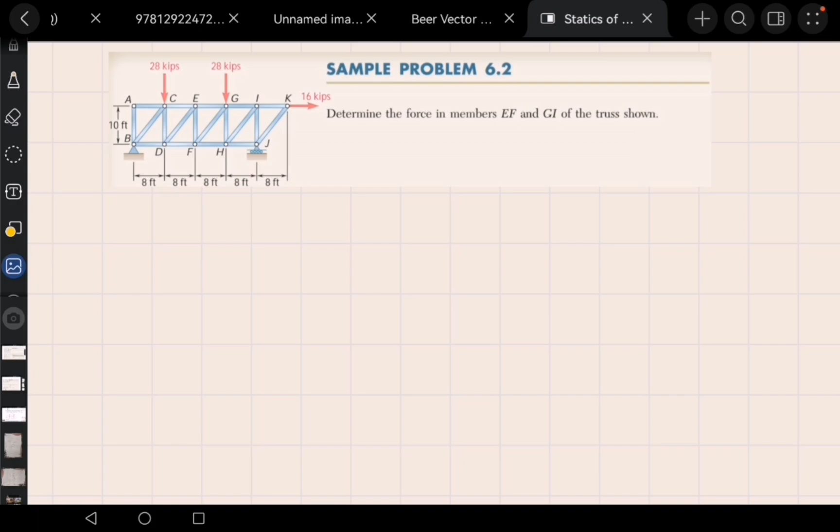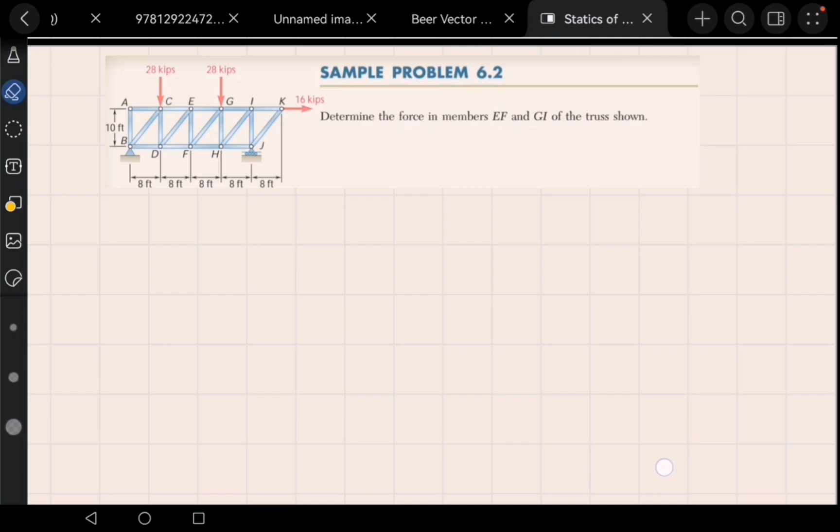Sample problem 6.2: Determine the force in members EF and GI of the truss shown.

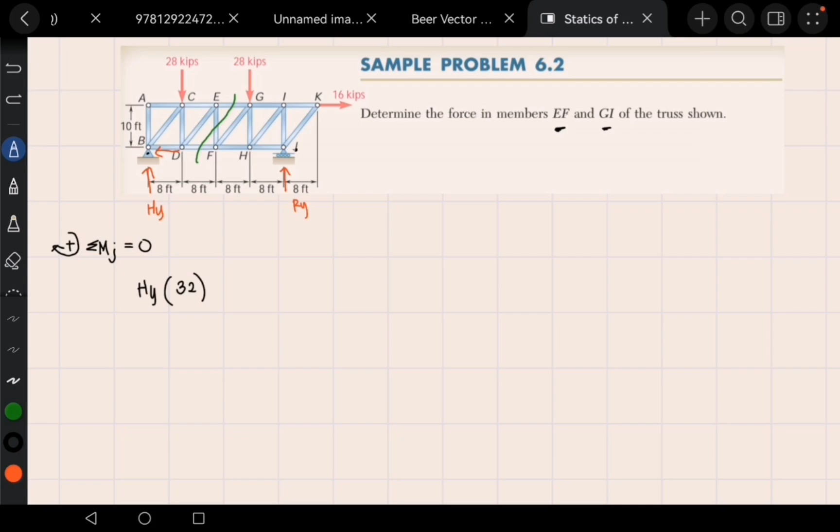Next is this downward 28 kips. When we take the moment, it rotates downward, like this - so that means counterclockwise, negative 28 kips times 24, which is the moment arm from C to J. That's 8, 16, 24.

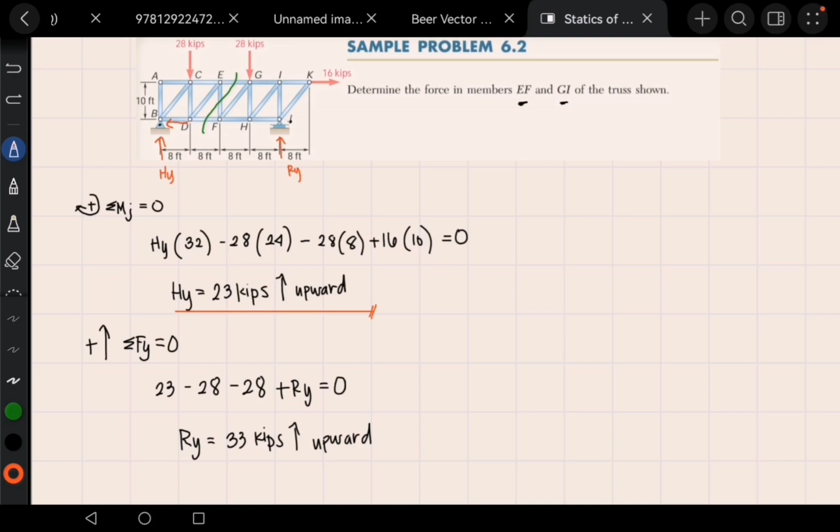First, we'll place the forces we solved earlier, which is HY, 23 kips.

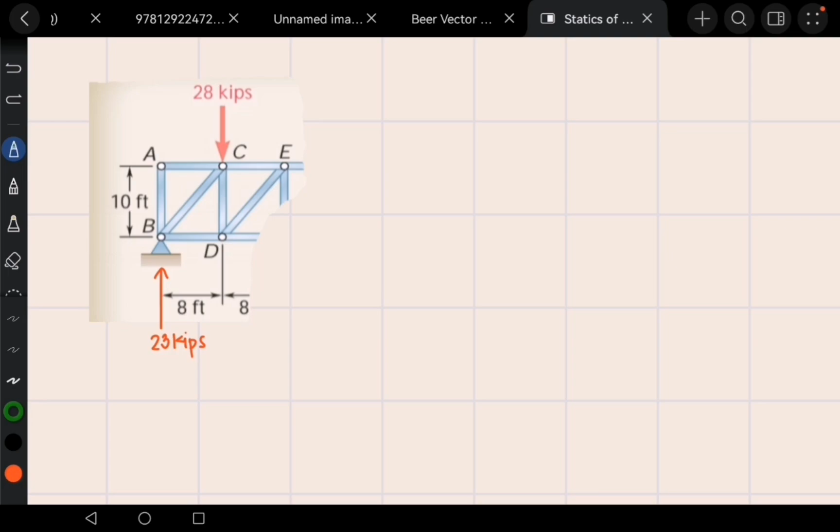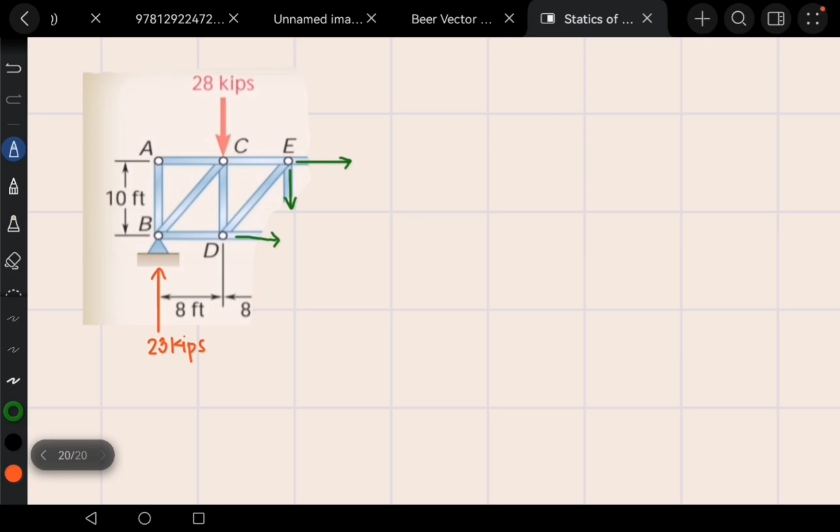So this is member EF. Ito yung EF. Tapos, ito naman yung EG. EG. And then, the DF. So, ito guys, yung mga kailangan natin solve.

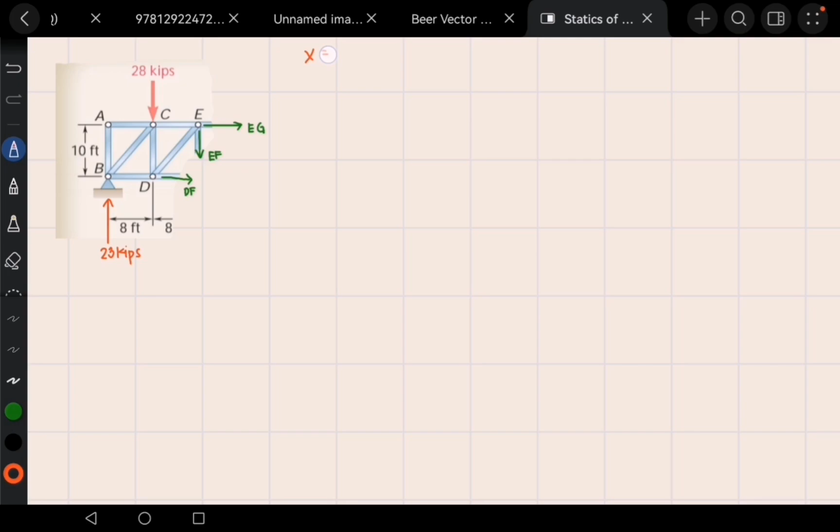So ang technique ko guys is, kung ano yung pinaka-konti na unknown, yun yung isosolve mo first. So maglalagay ka ng X equals and Y equals. Ilan ba yung may unknown natin in terms of X? Meron siyang EG and DF, so 2. Ang Y naman is 1. So unahin natin ang Y.

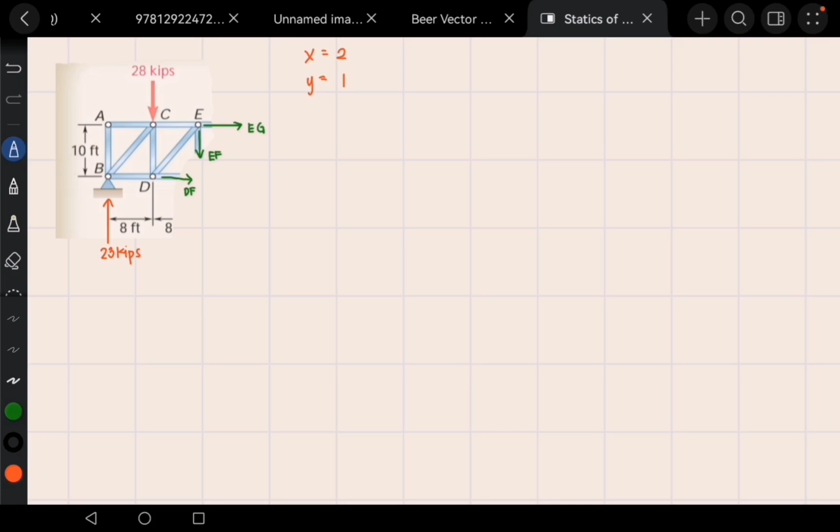Madali lang naman siya, magsa-summation of forces lang tayo. Summation of forces Y is equals to 0. Upward is positive. Dahil ang assuming natin is tension, so pababa siya, which is negative EF plus 23 minus 28 kips is equals to 0. Then, shift solve.

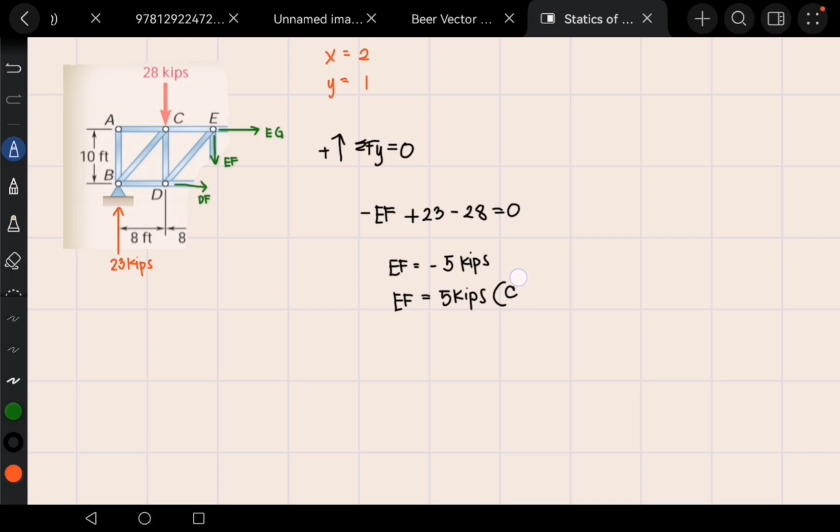Answer niya is EF is equals to 5. Negative 5 ang lumabas sa answer, so meaning mali yung sign convention natin. EF is equals to 5 kips compression. Ganun lang siya guys, ito yung correct answer.

Next, solve naman natin yung- wait lang. Or let's proceed sa isang methods of sections. Pwede naman na mag-proceed na tayo, pero kunin na lang natin yung EG and DF.

So sa kanila, moment naman yung para makuha natin. In this case, gusto kong kunin itong DF, member DF. Para dyan, para makuha natin yan, para ma-equal 0 itong EG, dito tayo magmo-moment sa E. So summation of moment at E is equals to 0. Clockwise, positive. Unahin natin ang member DF.

Sa member DF, ang moment arm niya from D to E is 10 feet. So DF, which is- ano para siya? Pag ganun siya yung ikot niya, di ba? Pag ganun, ibig sabihin negative DF. Pero, assumption pa lang yan guys. Times 10. And then itong EF guys, hindi na din siya kasali since andito din siya sa E.

Next is, moment naman natin ito sa hinge, reactions. Ang distance niya from B to E, ilan nga yun? B to E is equals to 16. Pag ganito yung ikot niya, so positive. Naka-clockwise siya guys, so medyo mahirap mag-identify kung saan ka iikot, so you must master it. 23 times 16, 8 feet to siya guys.

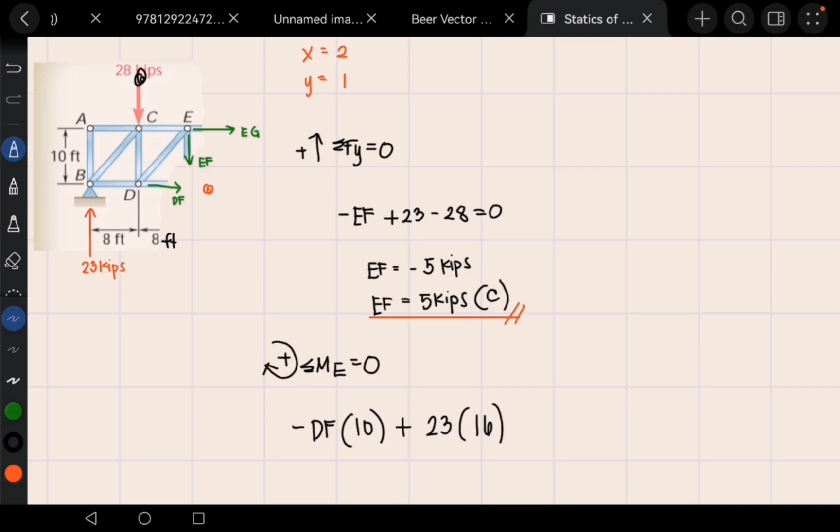Next is, ito naman tayong isang downward force. Ang ikot niya is pag ganun, which is counterclockwise. So negative 28 times, ang distance niya from C to E, take note, is 8 feet. Since lahat naman ay nalagay na natin, so may equals to 0 na tayo. Shift solve lang. Pero kung gusto nyo manuhin guys, para ma-master nyo, okay lang din. Okay, 14.4 ang answer. And nag-positive siya, so tama yung assumption natin.

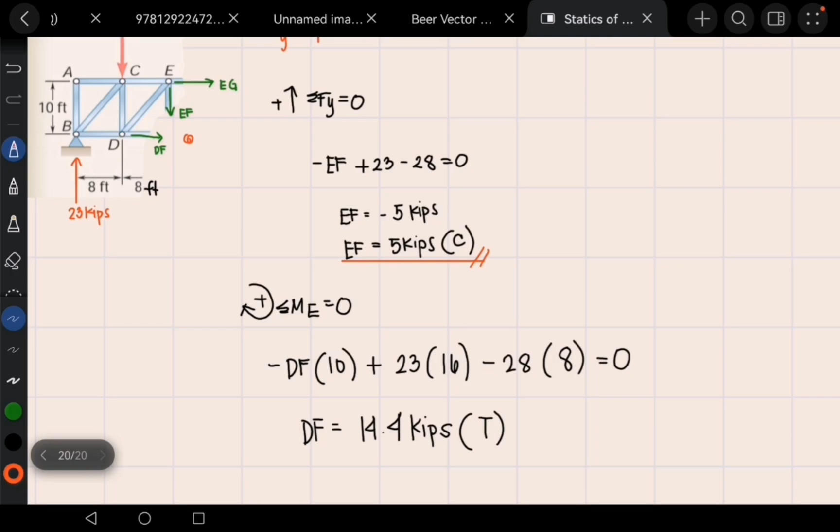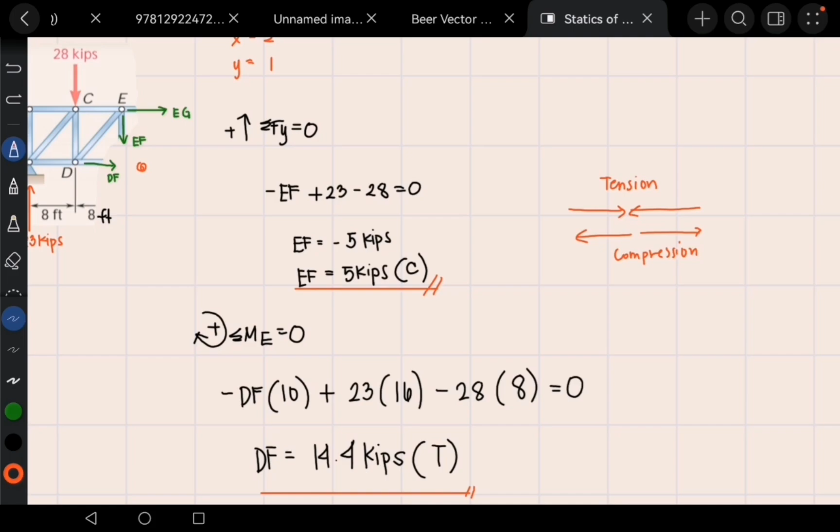Kips in tension. So guys, ang technique ko pala para mag-identify kung tension ba siya or compression is ganito. Kung nakaganito yung member, nakaganito, ang tawag ko dyan is tension, yung parang nagkakalapit yung mga arrows. Pero kung ganito naman, parang mag-aaway, compression yan. So maraming nalilito kasi ito most likely para siyang compression, pero tension talaga siya guys. So you must master it.

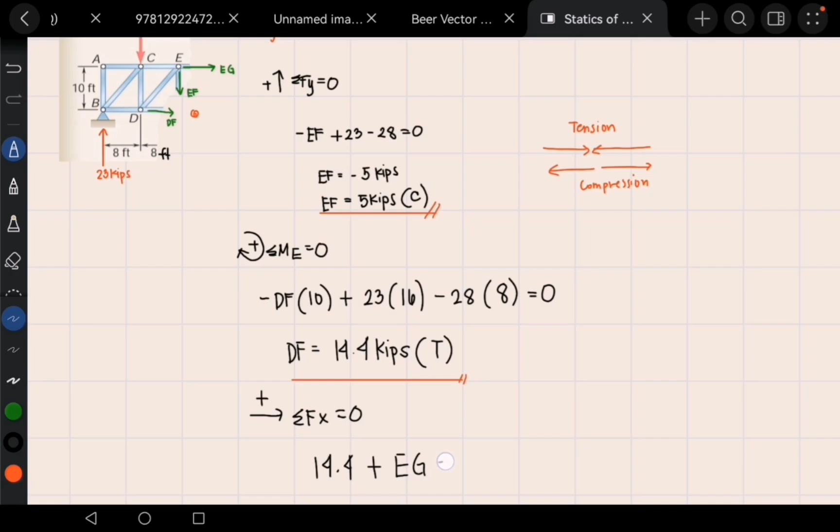Okay, so kunin naman natin yung moments EG, I mean yung member EG. Para makuha natin siya, pwede tayong summation of forces X. Summation of forces X is equals to 0. Right is positive. Dalawa lang naman yung meron tayo na ano niya. So nakuha naman natin yung DF, pwede na nating makuha ang EG. DF positive 14.4. At since tension yung assume natin, so positive EG din siya. Wala naman, so equals to 0 na agad.

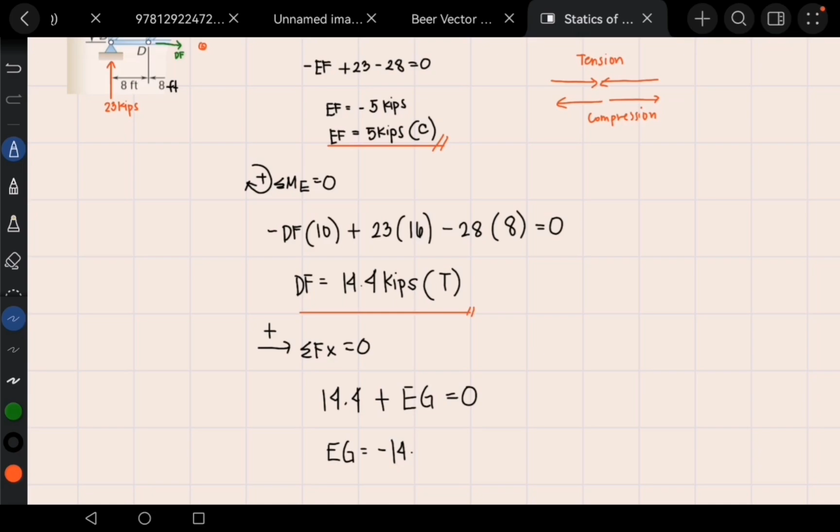So mamata-mata nyo na guys kung ano yung answer. So negative 14.4 ang lumabas, so mali yung assumption natin sa direction. So ang tamang answer is positive 14.4 kips compression.

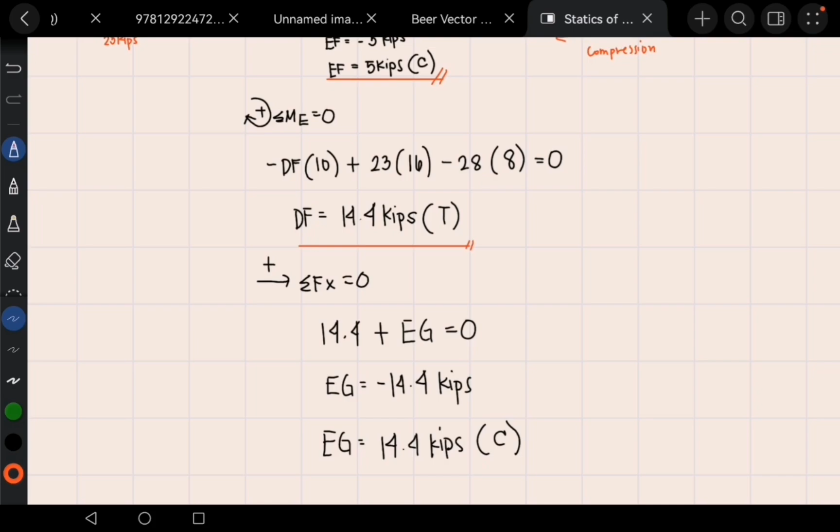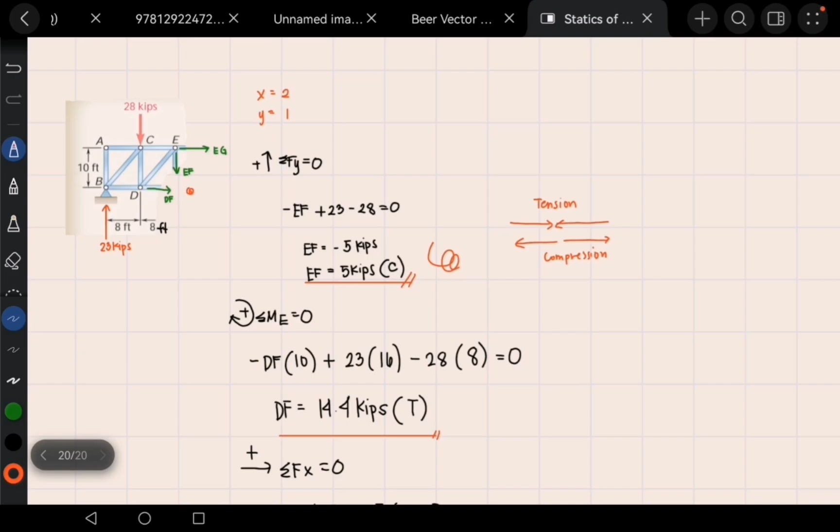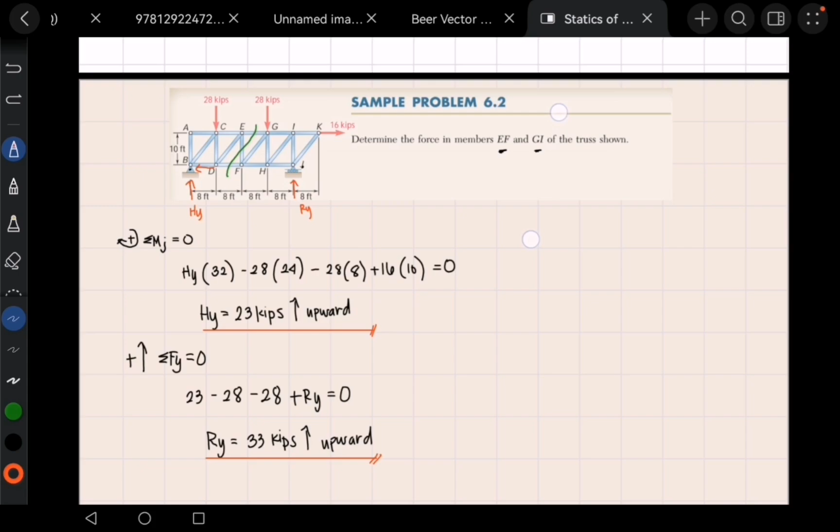Ayan, so dito na sa section na ito, nakuha na natin lahat ng unknown forces, which is ito lang naman yung hinahanap, pero sinalin na din natin yung. So next na hinahanap ay ang GI. Ulitin na naman natin guys, kakat na naman tayo dito since GI yung hanap. It's either dito kayo mag-cut or dito, ganun lang siya, for me dito na lang.